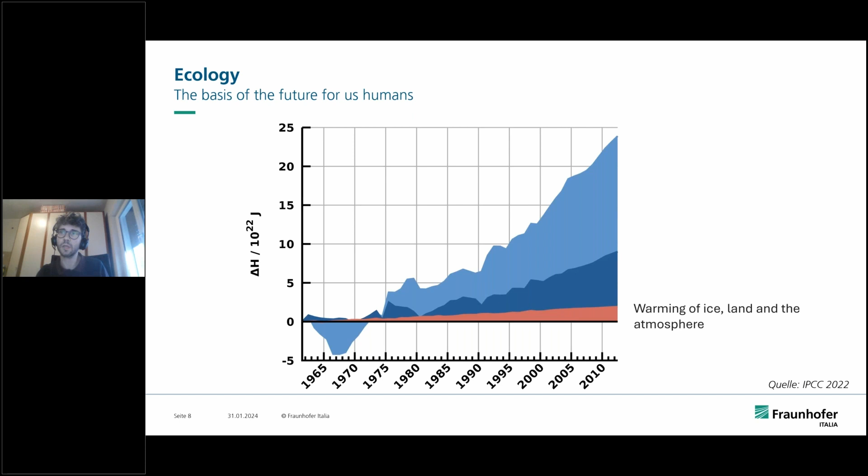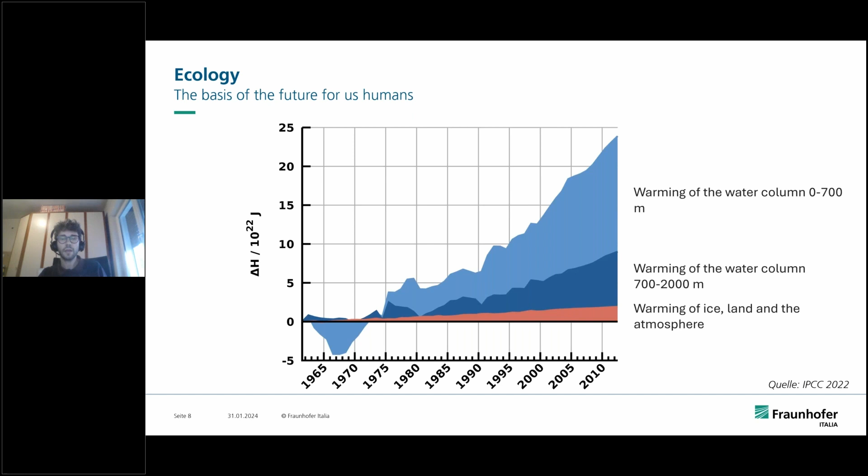We have here the part in red, which is the warming of ice, land, and atmosphere. We have here in dark blue the warming of the water column at the lower levels, so 700 to 2000 meters, and we have the warming of the water column down to 700 meters. So why do I show that, or what can we do now? We can now, of course, fit our well-known diagram above.

Here we split it into northern and southern hemisphere. As we can see, in the northern hemisphere we have already reached much higher temperatures compared to the southern hemisphere. Why is that the case? That for me is an insight that was very important to understand. It's because we have a lot of sea there. In the end, we have a lot of water that at the moment still stores energy, and that in the next years still has the potential to cause dramatic changes in our world.

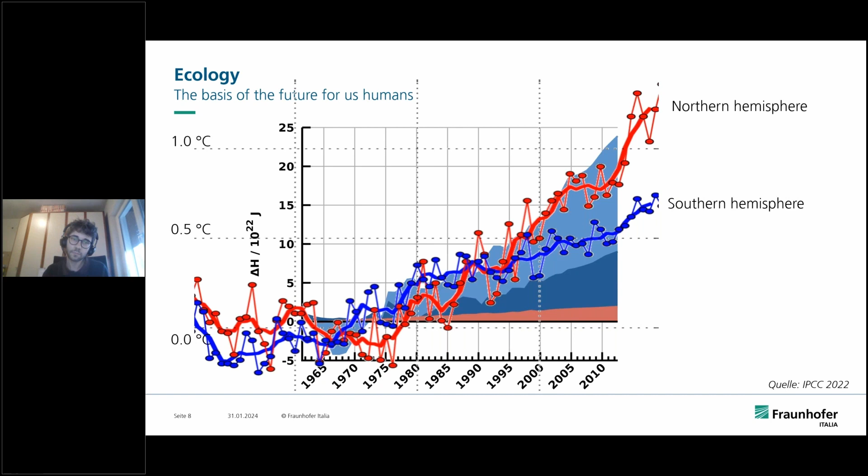So if we put this on the warming of land, we try to smooth it down, even if it's of course physically not correct, you cannot overlay this. Scientifically, this is not a diagram that you should take as scientifically correct.

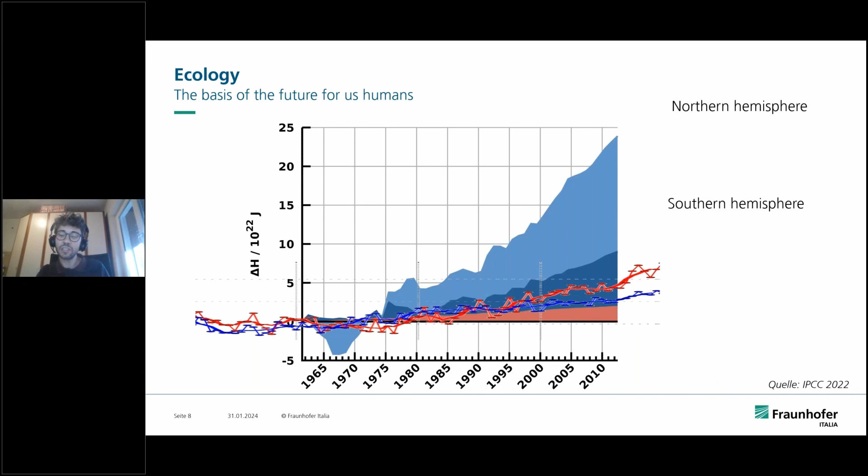We can see that changes are happening, and mainly somewhere else, changes that we maybe cannot even undo. Like coral reefs, or likely also climate changes, weather changes - not only climate changes but weather changes - where we have an impact, like this year in Milano with an airplane. This never happened before. It was very spectacular.

Sorry, here I just realized I forgot to translate something from German to English. We always have to deal with three languages, so don't be surprised if there's also an Italian phrase somewhere inside.

Where we have in the construction field the most possibility to really create an impact is of course in heating and cooling. So 40% of the final energy consumption in Central Europe - there are numbers a little higher, numbers a little lower - but let's assume 40% are attributable to buildings. In the buildings we live every day, in the buildings we work every day, and of course it's one of our most important environments.

We also consume the most energy there, and the major part of this goes to old buildings. So heating and cooling of old buildings really has a dramatic impact.

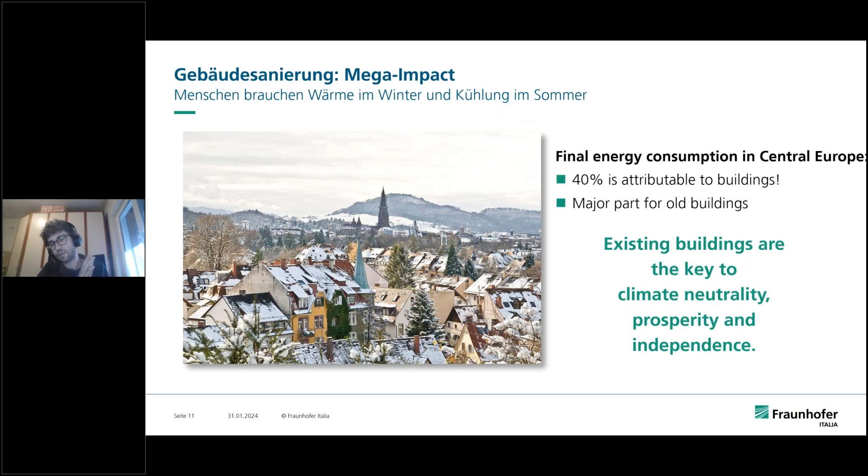This leads to a phrase we decided on. We have at the moment a big project, Fraunhofer internally, together with the Fraunhofer Gesellschaft, almost 10 million euros, for us and for the next years - and we have to say we are already too late. We say that in the meantime, we are too late: existing buildings are the key to climate neutrality, prosperity, and independence. So all the things we have seen in sustainability - it's not just about climate, but of course also social impact and economic impact.

From the part of economy, I would like to explain a little bit something that you maybe have not seen so far, and I hope you have not seen so far. These are things that make me always a little bit doubtful. When I'm starting a new project with customers, I'm always asking these questions that are arising now, which I will explain to you in the next minute.

The question here is: where is the promised efficiency? What we can have a look at - I take numbers for Germany here, but you can find these numbers for every country in Europe, and the same is for the US, though they look a little different, sometimes even worse. Germany is a country that is growing, slightly growing, maybe half growing some people would say. It's not China, but it's also not a country like Italy or Spain, where we have some dynamics, mainly in the construction sector, which may influence these numbers. In Germany, nobody would worry about the construction sector - maybe in the last months yes, but before, nobody would worry about them - and everybody knows Germany is a country with very high industry, very important for industry.

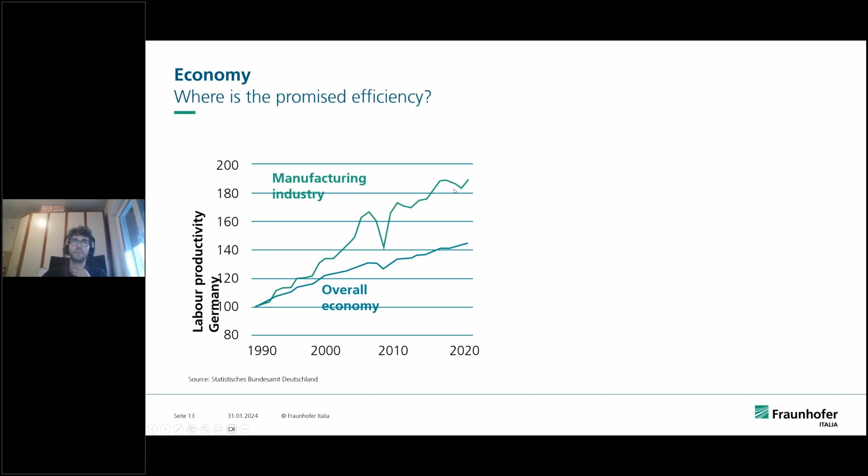What we see from the 90s until now, it's quite linear. Maybe before it was going up a little bit before the financial crisis, but after that it's again linear, and I think if you put a line here it has almost the same steepness, maybe even getting a little flatter. So maybe it's not anymore like it was in the 90s or the beginning of the 2000s.

If we have a look now at the construction sector, and that makes me always worried, we have productivity now which is the same as 30 years ago. We took this diagram because you can see everything and something more. If you go back in time, even to the 60s or 70s, also where the boom was here, the construction sector was even at 120, 125%. So what does this mean?

60, 70 years ago, people built, constructed. Of course at that time energy efficiency was not that important, but in general we talk here first about creating a building where we live every day, where we work every day. We were much more productive. So one construction worker, one architect, one engineer, mix them together, constructed more than now.

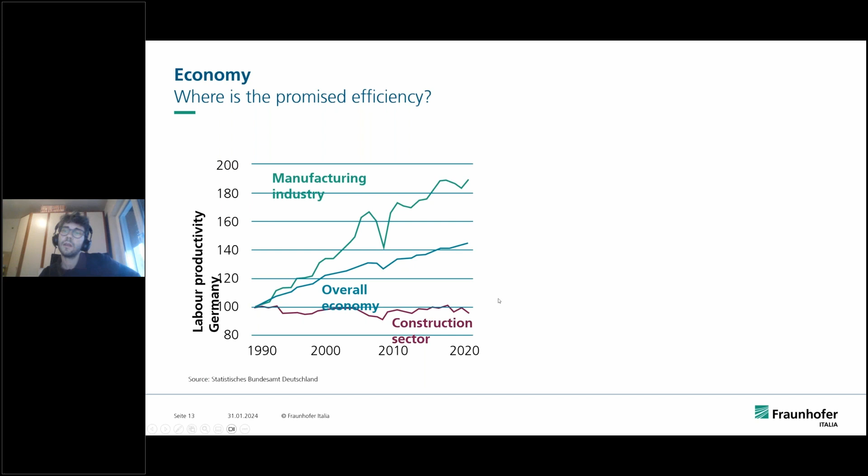Okay, that you can discuss, maybe there was more motivation, or maybe people were still working 60 hours instead of 40 hours and so on, so maybe a lot of impact. But anyway, in the last 30 years we still had no increase, so why is that the case? And if you look into the numbers in Italy, they are even decreasing. So we are at 80%, 85% at the moment. People also have a lot of explanations for that, but not really a single one, from my opinion, is valid. So what is the issue?

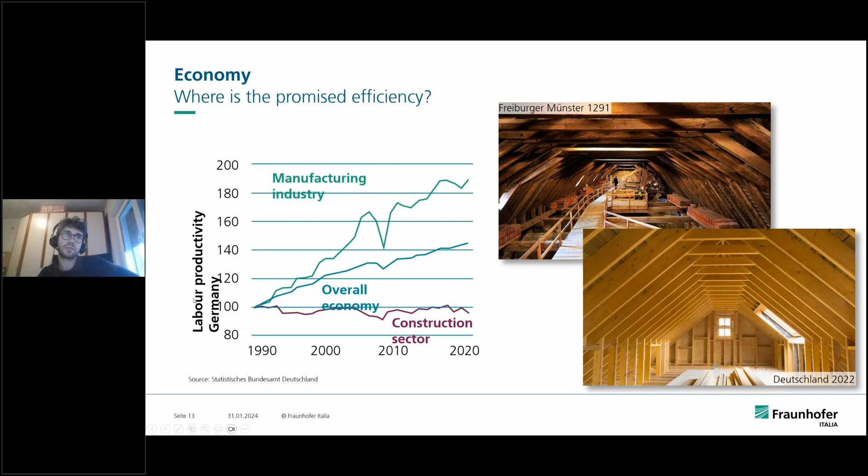We can also have a look here, and this is a little bit more provocative because honestly I cannot prove it, and honestly I'm working for customers that would like to work with us on digitalization. They come to me saying they would like a nice tool, something on mixed reality tool sets, virtual reality, very nice stuff. We do also things with robotics and everything. But I have a hypothesis.

If you see here the increase that was in the beginning of the 90s, also the years before, now you can see in the last 10 years it's going slower. Now you can say, okay, this was 2008, that had such a big impact that we still see this in the numbers, and nothing changed, or even getting worse. No, in my opinion, that's not the truth.

In my opinion, there are 2 points. If we think digitalization started in the 90s, there were the first computers, we started in the construction sector slowly changing from paper to computer work. Text and so on was written in a text program as is now standard. Anyway, maybe it started in 2000 - it really started in 2000, we had the first internet bubble that exploded. It started there. If I'm now saying digitalization makes us more efficient, where do I see that here?

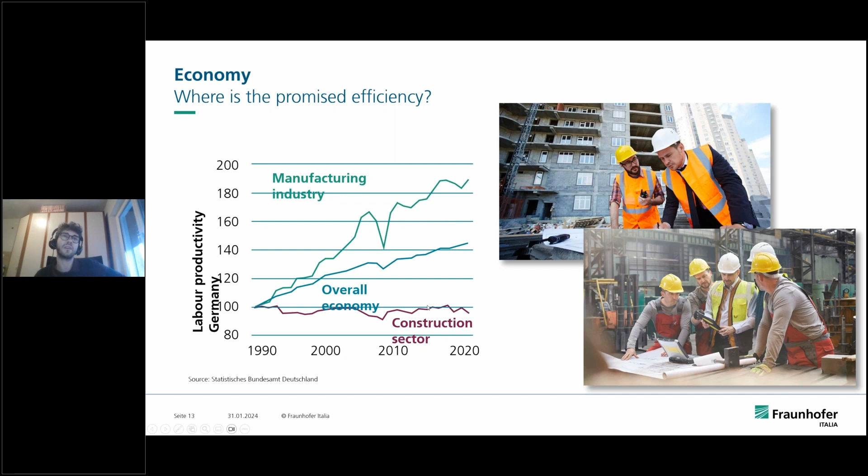So if we deal with low dynamics and a low number of elements - for example, I go there and ask if we can go and drink a coffee. I'm going there, I'm not writing you something, you can still decide because you have time to think, then we go, we take the coffee and so on. It's a simple thing - you think, I have time, I go, yes.

If the number of elements is getting more complex - I don't know, the coffee example maybe doesn't fit anymore here - but if the number of elements is very high, then things are getting complex.

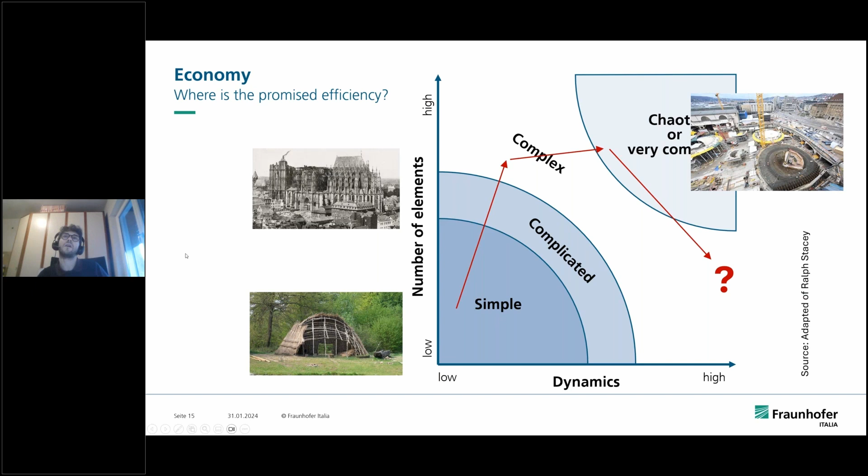This is something I would not like to discuss today because we do not have enough time for it. One thing very important for me in this part is adaptation, because still a lot of people, also in the construction sector, are only thinking until 'oh, we need to put insulation,' and then it stops. We are still in a situation where for most people this discussion stopped at 'we put 16 centimeters of insulation, isn't it enough?' No, it isn't.

So I tried to give you an overview based on my opinion and my experience in the last years, in particular this gap between efficiency, how it should be, in particular looking at digitalization. Automation in construction is almost not available, so there is no gap, but in digitalization there is. And also considering that in the end we have an issue how to do this work that needs to be done, so we have here a lot of potential, but also a lot of risk.

And we always have a prototype. In all buildings, it's always a prototype. Every single building for every person is new. There's really no standardization. If you're not into the construction sector, there's really nothing standardized. You can get everything you want, the way you would like to have it, in measures you would like to have it, whatever you can imagine.

The same is with planning. Every architect is starting from zero - I hope there are not too many architects or engineers in here. It's the same: nobody deals with what happened in the project before. They always start from zero.

So there is way too much manpower involved, too much complexity, and too much material consumption, as we've seen in the pictures before with wood. We would know how to make that better, with less wood - it wouldn't be necessary. Just simple engineering. Way too much cost, also because of material consumption and manpower, and way too much time in the end.

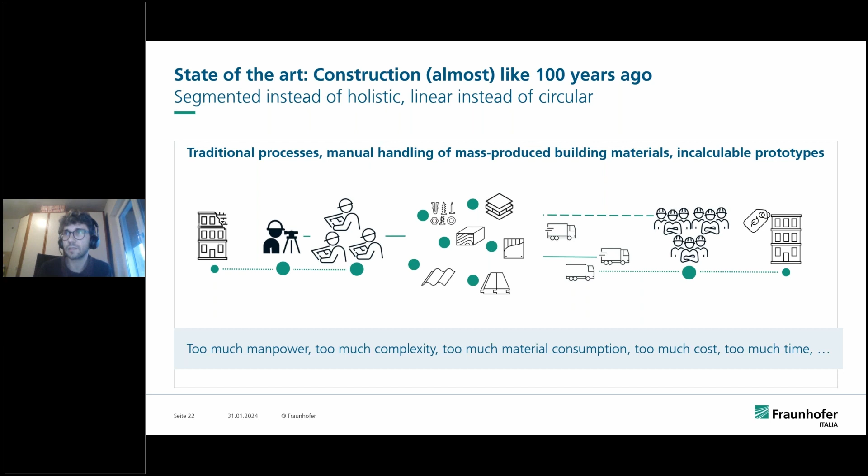This is something you have to see in a life cycle analysis. You need to consider everything - what you can do with this afterwards, what you can save, of course. So it's not said that it's bad.

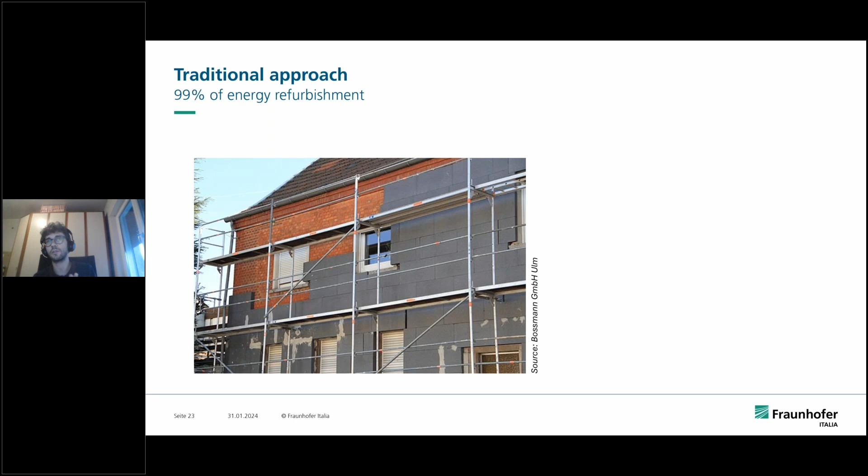Made by people: every single plate taken by somebody, plaster put on it, put on the wall, then drilling holes into the wall to make it more stable again. Everything done by hand, step by step.

There's insulation material and the connection to the floor so it doesn't get wet. We have more than 21 materials and of course more than 21 steps, because every step here is done manually - one material, one step, done by human people. So we are really, really Stone Age.

The difference is that before, it worked with three materials - wood, a little natural insulation, and maybe something to put everything together. Now we need a lot of other tools and materials to do this - getting these things out and using them again, maybe.

Recycling - I'm not talking about recycling today. I'm not talking about reuse. I'll tell you why: it's a very difficult topic and, in my opinion, something we should not discuss at the moment in the construction sector. It's impossible.

Hopefully in 50 years, when this facade needs to be redone, we'll find ways to either renovate it without pulling it off, or find really efficient ways to reuse these materials. But if you look at this at the moment, it's catastrophic - you cannot reuse these things.

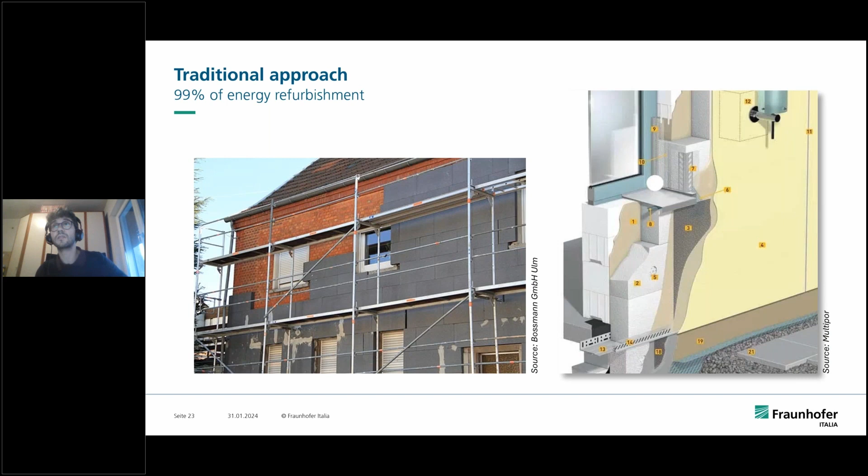There are things that should be recycled during construction and so on, but what we put there is a matter of time until we find a solution. At the moment, it's important to react - and we have a solution for this.

We have prefabricated facades. You can find big machines here doing things automatically - I have to say not too much automatically, since most things are still man work. The only difference is that instead of making it on the construction site, you make it somewhere inside.

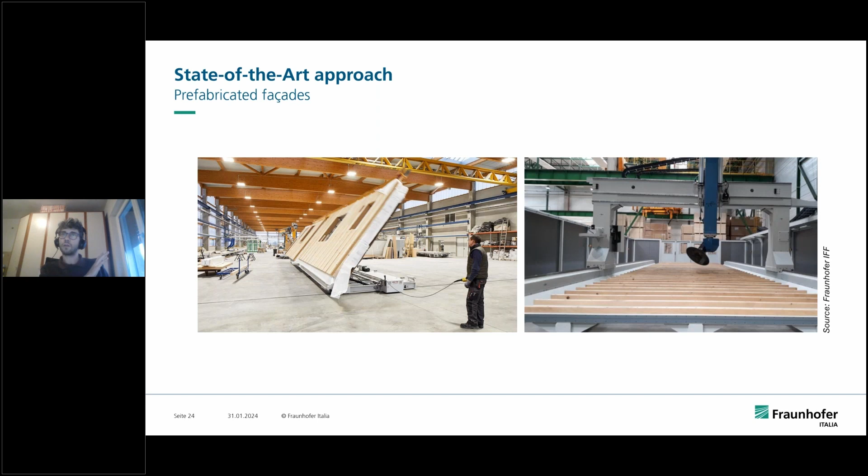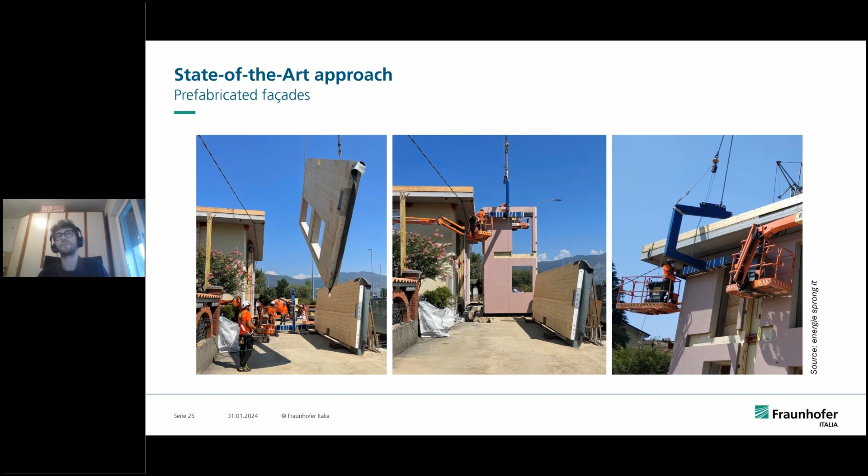You can then go to the construction site, bring these large elements, put them with a crane there, and mount them. Looks very nice, in my opinion. They're also very stable, with a lot of features inside. We can put ventilation systems, heat pumps, everything you can imagine inside them. There was and still is a lot of research going on, and there are no limits.

So, okay, solution found. Quite fancy, no? Maybe.

So if I tell you now the issues, and tell you why the price is coming because of these issues, you're maybe thinking, okay, why? You'll understand maybe why these things are not standard. Here are some pictures that I've borrowed from somebody I know.

In the end, we are working with something that already exists. So there are still old components, old things that must get out. There are still connections that must be made, which are very complicated. There's still insulation, like here, polyurethane foam, which is also not easy to either remove from an old window, nor can you say it's a sustainable material.

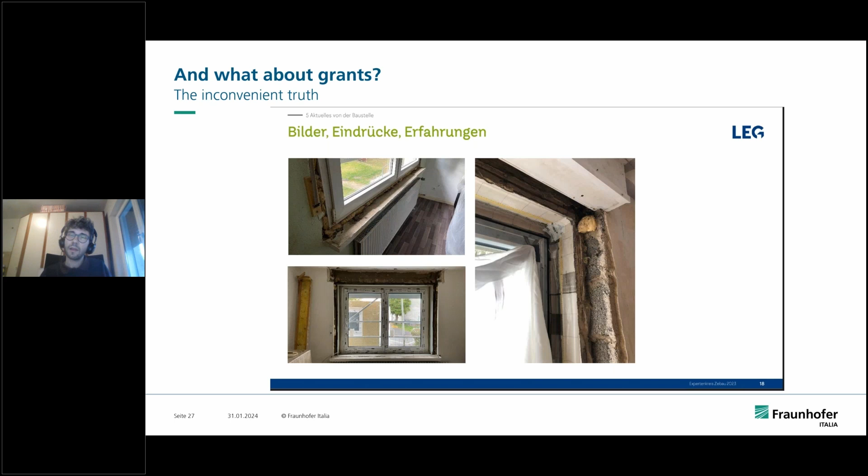Also, sometimes you need a lot of space to mount them, because they are huge and very large. And as you can see here, there are no balconies, or sometimes they remove the balconies.

So a lot of things in the end are very complicated, which makes these things very expensive. Even though I like them a lot and have done a lot of research on them, unfortunately they still cost twice as much as traditional insulation. And if most people are still hesitant about doing even a traditional insulation to save money and energy, I cannot sell them something that costs twice as much.

The issue is something we've seen here in Italy, and I come back to that point. Three years ago, during COVID, the government decided to create super funding, called the superbonus. They gave you money to do renovations, really gave you money. You could get 110% of your investment back.

There were banks and other big companies using this. They were saying you get the renovation for free. We take the 10% as organizational effort, and you will get a renovated house. Seems optimal, no? Seems like everybody must wake up now and do just like this, and everybody else not doing this is stupid.

So what are solutions? Solutions could be the things I just showed you, prefabricated facades. This is definitely one solution that will come in the next years. There will be changes, in my opinion, and in our opinion.

We are working, for example, at the moment on facades that are smaller, so people can handle them again without big cranes, because these big cranes were an issue. We're also allowing it to combine with traditional methods, because we are not getting rid of them at the moment, but at the same time trying to solve these issues, which is quite difficult.

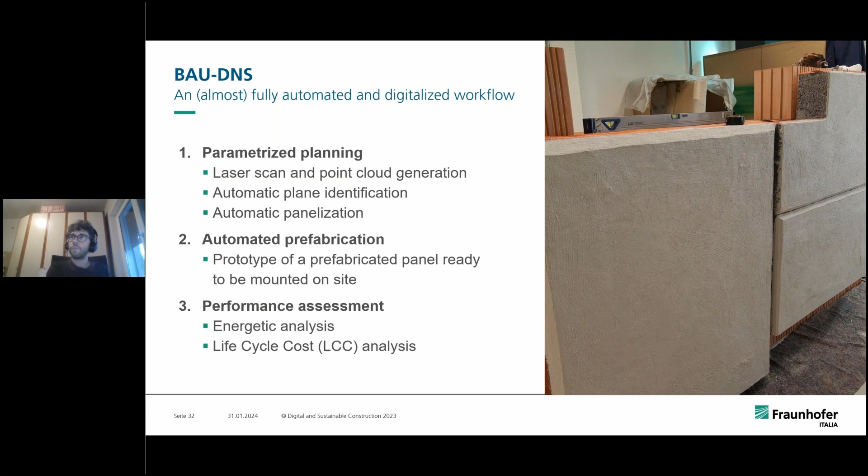One important thing is digitalization. We must have a workflow that starts from the beginning and goes consequently to the end. So I must have a digitalization workflow that does the things I'm showing you here: survey of a building, deciding what should be put there, how it should be constructed on the construction site, until elements are coming to the construction site.

Fully automatic. We simply have no time. We do not have enough architects to handle all of these things. Bureaucracy must really be settled down to a minimum. Italy is really crazy with these things, but the European Commission is also planning things that are not making this simple. Bureaucracy must be reduced to an absolute minimum.

We must then have the chance to use digitalization methods there. So part of these things must be automated. Otherwise, we will not increase this number, we will not increase this value. We need a rate that is much, much, much, much higher than at the moment.

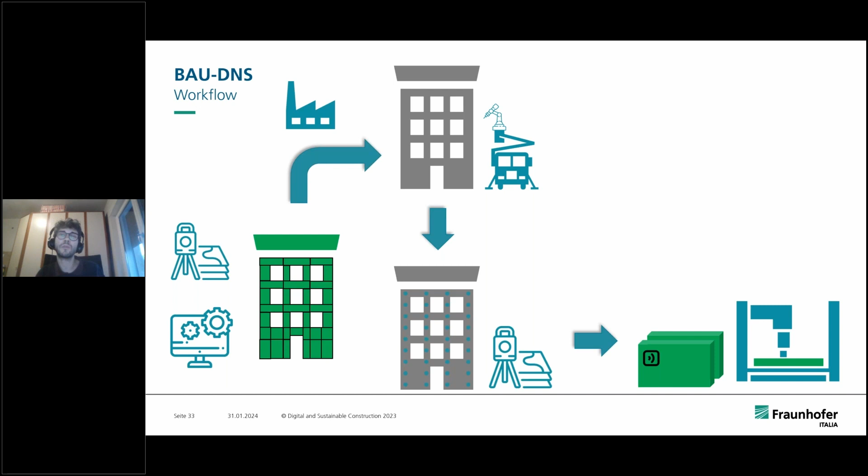So prefabrication, adaptation, maybe on the construction site, making things simpler to use. Also maybe letting more people work on these things, even if they do not have the training for this, but at the same time ensuring the quality is good.

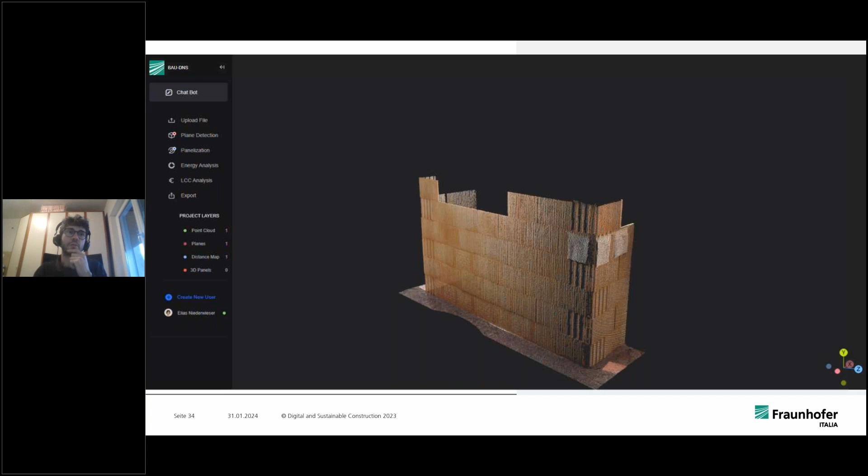We have here a prototype that we did where we can do things like this. This is still quite an old video, but I don't have a newer one. We are also working on something much more advanced now.

So we can now have a house, we can identify it from a 3D laser scanner. You go there with a device, you put it there. This is done in half an hour. You have your full outdoor facade on millimeter range.

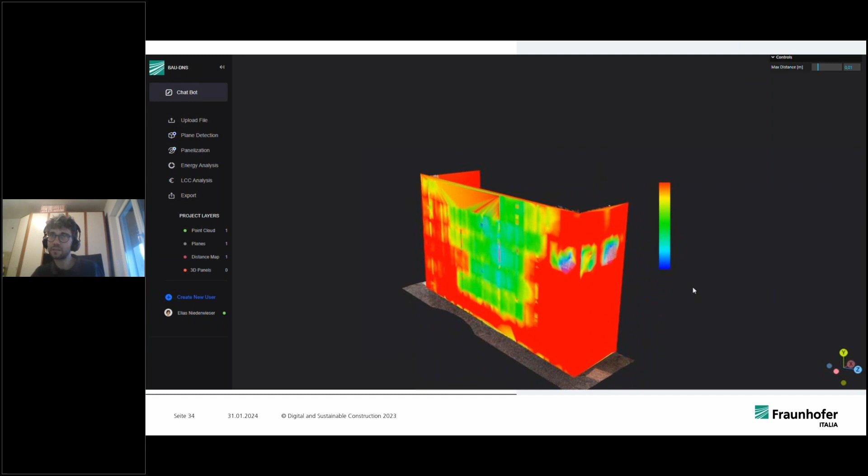You can put it into artificial intelligence. You can visualize smooth planes for it. So you can imagine a wall is not always straight, but it also has some holes and things like this. It adapts these things and gives the fabricator the exact measurements that must be done, so it can then be exactly fitted on the construction site.

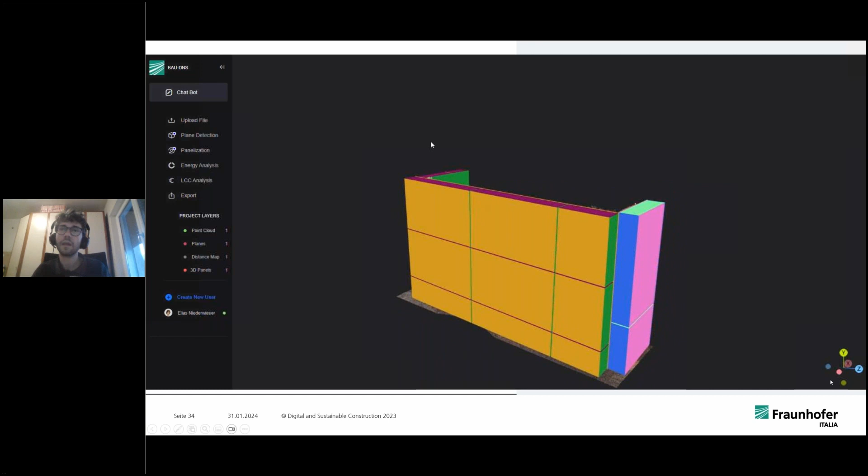This is one thing that is still missing, and one reason why these prefabricated facades I showed you before are very expensive.

We must also understand very simply what the impact is. In the end, it doesn't matter if I have 1 or 2 kilowatt hours per square meter per year, this is the unit we calculate, so how much energy we need to heat or cool. If it's 1 or 2 more, nobody cares.

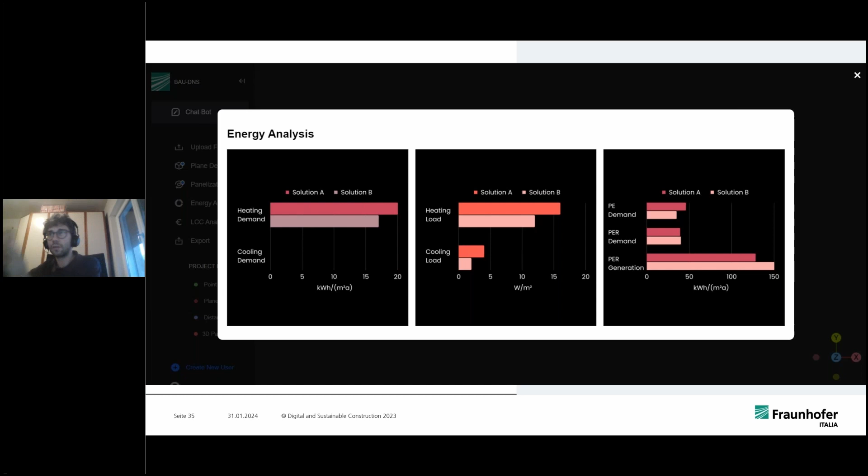What we need is quick solutions for these things. Quick, of course, but consistent, it should not be completely wrong, it should not be something that doesn't work. That's clear. But we should also start being a little bit pragmatic. And then we need to overcome the complexity, because we have an issue with complexity.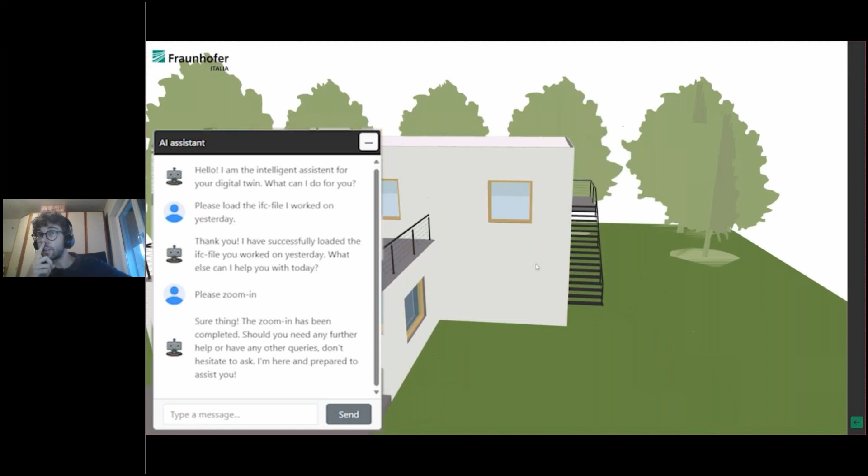So what we are working on is, for example, something you know very well, I'd say, ChatGPT, but in a different way, so that we can also work with programs using that. So I do not need to understand anymore each of the steps I need to do in a program, I just want to do a certain thing.

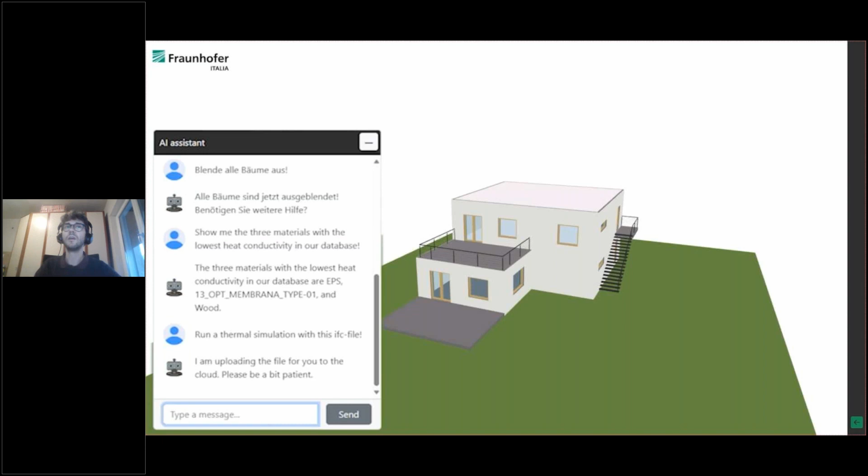Like here, I would like to understand what materials are in my database, or I would like to run a simulation, and I can just write it. Or here, the output is I get 21 kilowatt hours per square meter, and I'm asking if it's feasible to reduce it to maybe 19 kilowatt hours per square meter here, and then propose what is the best thing. Artificial intelligence can do that.

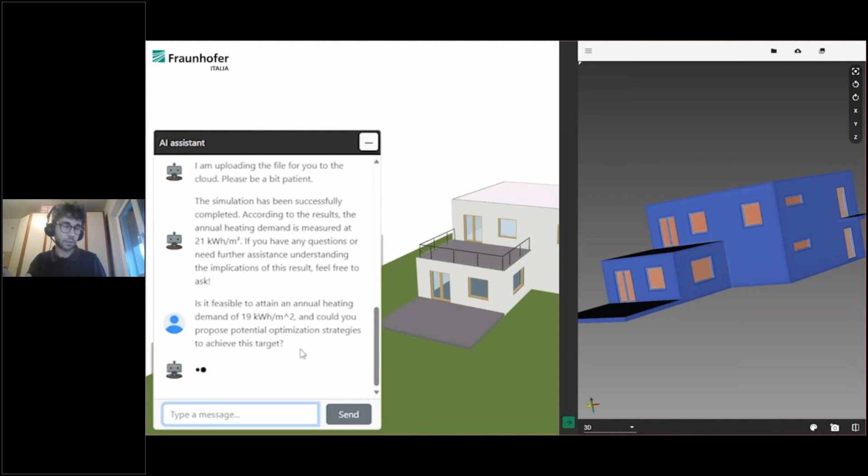So it's calculating, it's a little bit sped up here, the calculation takes a bit longer, repeating what I could do. I could make insulation with a more optimized value. I can change it.

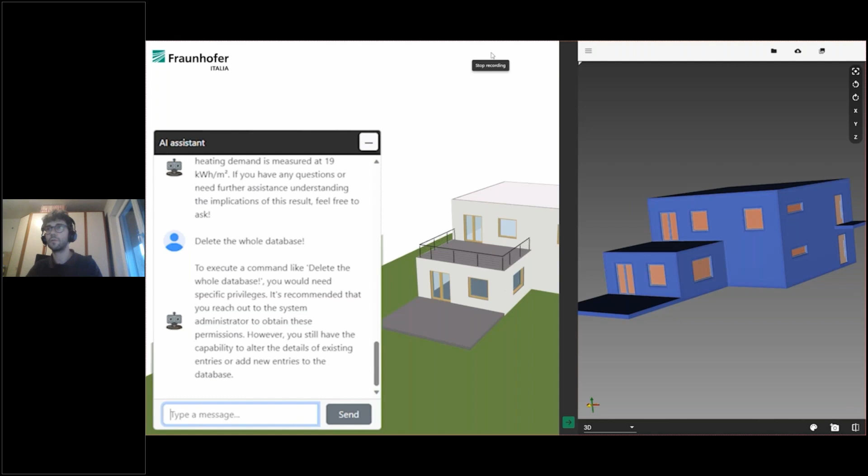I can do the calculation again just by typing and writing. In our opinion, one way to get rid of this complexity - if you look at programs at the moment, the first thing somebody will tell you is architect. The architect in the end is the one that coordinates everything. He will say, I need an expert for this, I need an expert for that. And it's correct, we need the experts. But at the same time, the expert costs money, the expert costs time, and so on. For a lot of things, we think expertise will go into artificial intelligence.

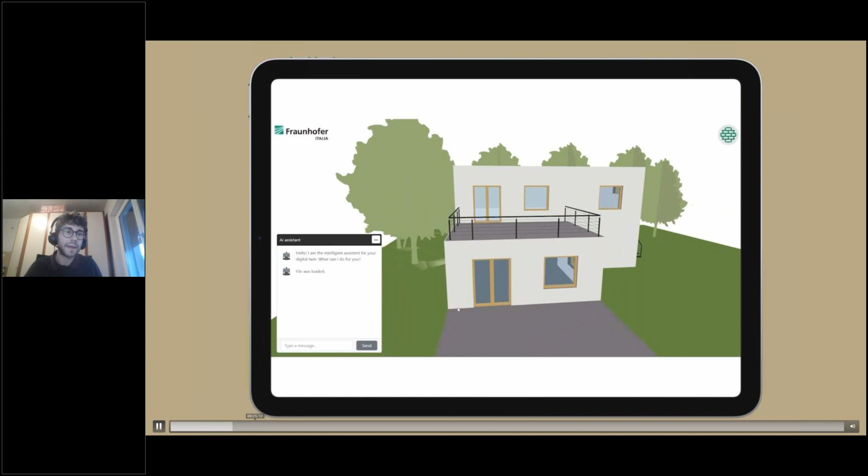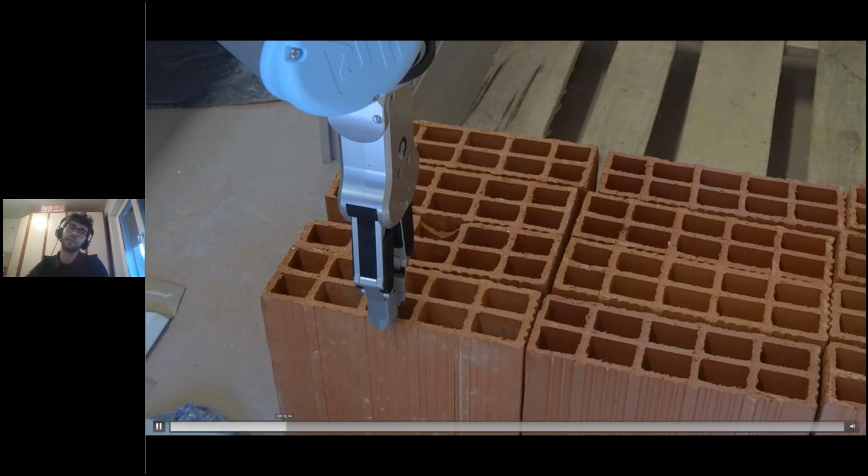Another thing we made - sorry, the sound is likely too high, I hope not - is making factories on site. So how to produce panels on the construction site. Here we showed it for a brick because this was something we wanted to do. You do simple things, also with a chatbot, and let the automation do it on the construction site. You take the container, put it to the next construction site, and produce there again the next prefabricated facade in small elements, smaller ranges, but highly customized.

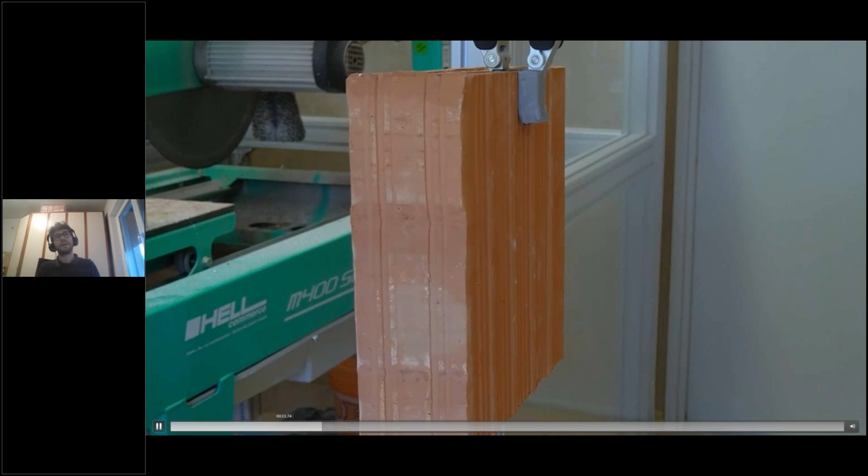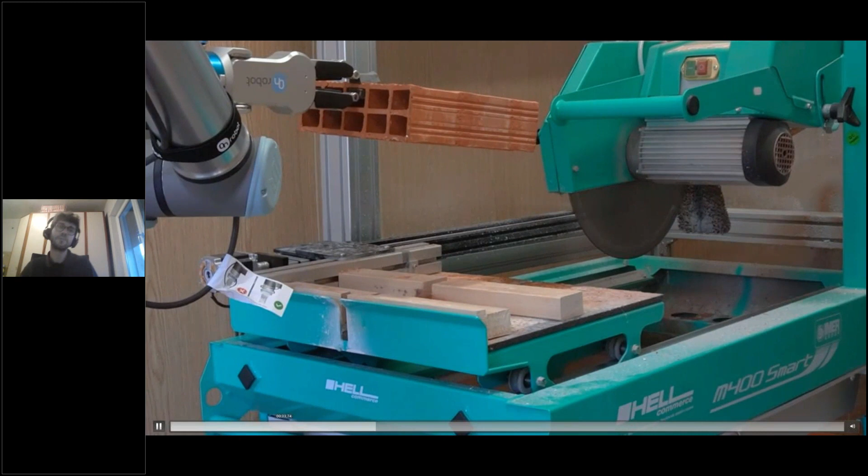So people want highly customization. We need it sometimes because we do not know what to expect. If we open a wall and see it's a completely different material, we have to decide to do something different. We can maybe solve this with things like this - here we are doing brick cutting that is done automatically. I'll fast forward a bit because otherwise we won't get to the conclusions, and if you still have questions, there's no time.

So, conclusions, last slide. In my opinion, for some goals - we're talking here about 1.5 Kelvin - we are too slow. The construction sector is not ready. We slept in research, we slept in construction, we slept in government, we slept in the laws, we slept in the social component, we slept everywhere. It's too late, we will not make it, it's impossible. But we cannot stop, of course.

So there's one important part: we need to adapt. We need to consider from now on that buildings must be very, very efficient in the future, but at the same time resistant enough for changes in climate. This is still, in my opinion, a discussion that hasn't started very well. We need to assess this construction sector's base. We need to work on it, and it will not be simple. I don't have a solution for that, to be honest. I'm hoping somewhere a startup is forming, like Tesla, and doing a revolution.

The things working at the moment, like what I just showed you - for example Energiesprong - they are not the solution. They don't get it correct at the moment, but they have good ideas and correct approaches. But I think the final solution we have not seen so far.